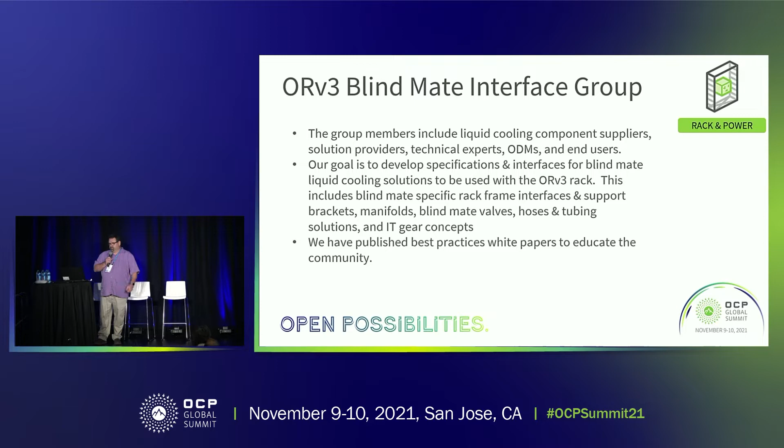Our work streams: the frame. We're developing interfaces, support brackets, and structural enhancements. I'll talk briefly about it a little later in this slide deck, but as we get further along in the discussions, we'll get more details from others in the group as they come up.

We have the BlindMate Manifold work stream, which includes interfaces and design specifications. We have BlindMate Quick Connector as well, where we're developing specs and developing components from multiple suppliers. And the BlindMate IT gear specification - we're not making a spec where you have to make a chassis just like what we're providing, but we're going to provide interface requirements as well as a design concept that people can leverage for their own designs as needed.

And on the hose and tubing solutions, there are unique requirements around BlindMate that we'll get into a little bit later, and we've been working quite a bit on that.

On the white paper side, we have a manual couplings and hoses best practices that was released last year, end of summer, through COVID, which was pretty cool to see us actually make some solid progress despite those challenges. And this past summer, we released a logistics integration best practices, and I'll talk a little bit more about those moving forward.

So let's talk about the concept for ORv3 and how we're mounting manifolds. This is a review of the rack. The manifolds are installed split on each corner of the rack with the cold and hot on opposite sides. The idea is to maximize the amount of service space between the bus bar in the middle and each of the manifolds for things like modules and fans.

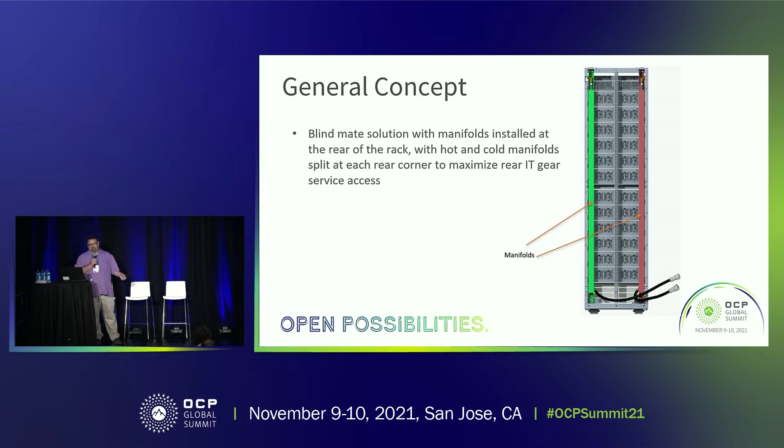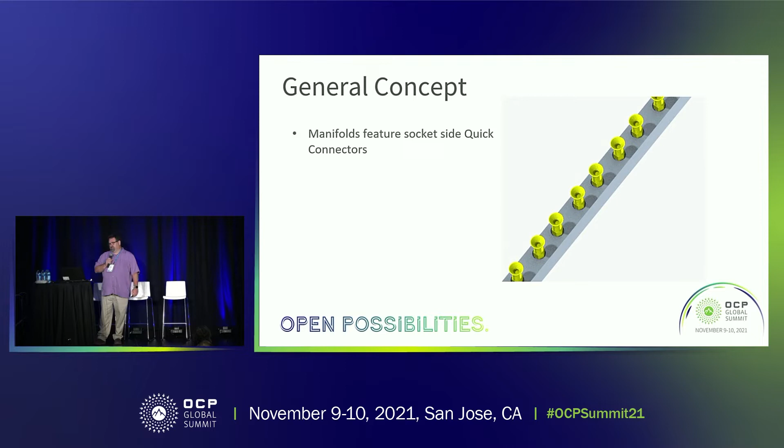On the manifold side, the manifolds feature what we call the socket side of the connections with the valves - that's what the yellow geometry is showing there. On the IT gear side, there's the plug side, which are those yellow items kind of shadowed inside the box. They're in a protective area inside there, as well as unique features for mounting them and interfaces for BlindMate injectors and things along those lines that we'll talk about again a little later.

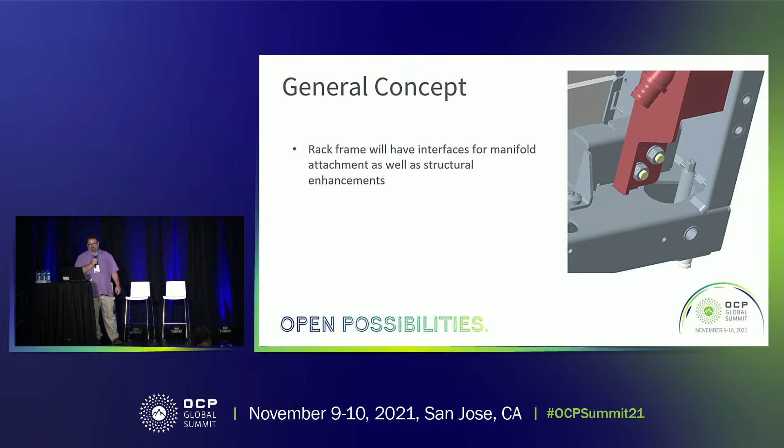And I'm being high level on purpose. I want to give people an understanding before we dig down a bit more into the details. So stay tuned. On the frame side, we have interfaces for mounting the manifolds as well as structural enhancements to overcome things that we'll talk about in a minute here.

The features include stiffening members to counteract the mate forces from the fluid pressure, as well as the springs and all the valves - you start adding them all up, the forces add up very quickly. The manifold interfaces and mounting features will also be in the rack. I think Stephen talked about this a little earlier - the idea is they're going to be bolt-on items that you can add as needed. They're not fundamental to the frame, making your ability to change fairly easily from a regular rack to a BlindMate rack.

We also have been using an extensive amount of FEA analysis to optimize this design. We're talking about FEA by the manifold suppliers, by our folks at Wiwynn on the IT gear side, as well as Rittal.

We have a guy who's spent a tremendous amount of time optimizing the design in terms of structural analysis, which has been awesome, great teamwork there. We've also had some challenges around the need for tighter tolerances with BlindMate. When you're talking about a frame at scale, sometimes those manufacturing methods aren't the most tight in terms of tolerance capability, so there's been a give and take in optimizing around those trade-offs. We're also focusing on ease of assembly and modularity.

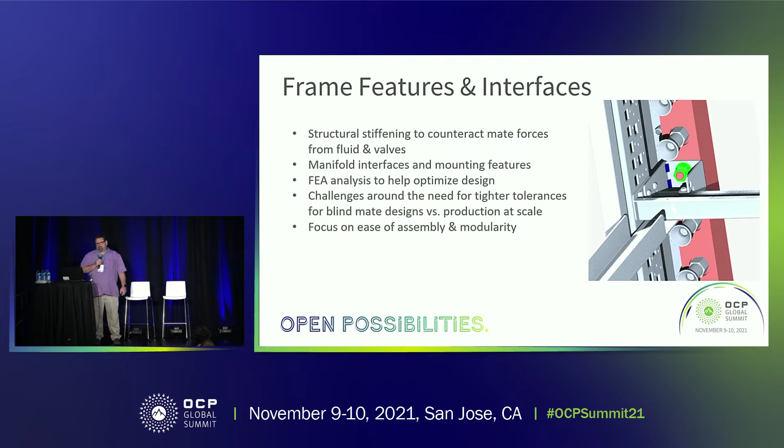A little bit more on the manifolds here. Similar theme around tolerances: if you think about a manual connection with a hose, you don't really care where those valves are because you have a flexible hose connecting between elements. Whereas in a blind mate, you really care about registration in terms of where it is, so there's a lot of work around getting that to work out.

I can't tell you how many tolerance loops the team has done. We have registration features for ease of assembly, and over the last build we made a huge improvement there. Also, the manifold is actually a structural element - it has to help counteract these loads. It can't be this thin metal, thin wall design. It's actually a key part of ensuring the design is robust.

We're going to define the key interfaces and features, but we're going to allow freedom for suppliers to do things in non-critical areas. We're not going to specify every radius, every wall thickness, every detail. We're going to provide the interfaces and features on the frame and key location requirements for the ports.

We've also developed this past year the idea of a modular air purge option. If you look in the upper right there, that copper colored piece can actually be removed with a quick connector. So if it gets damaged, you don't have to throw the manifold away - you get your replacement, put it in, and you're still off and running.

Another thing is we're trying to keep it simple and consistent with the industry, so all of our port callouts are per industry standards.

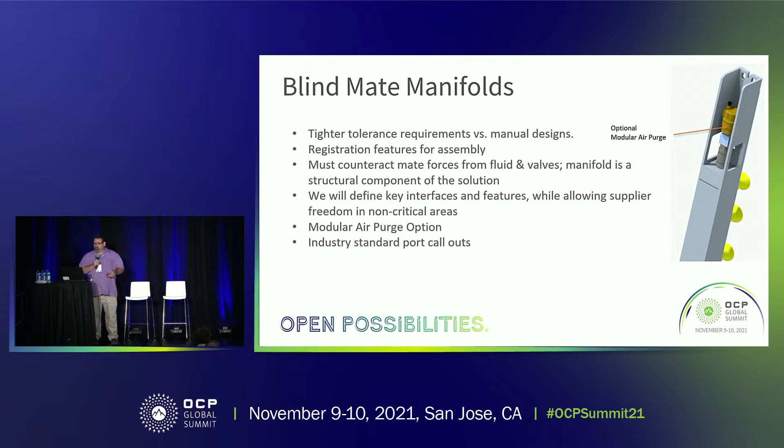On the blind mate valves, due to all the rack tolerances, deflection issues we talked about from the mate forces, gaps between gears and racks, all those tolerances that stack up, this design needed to be different from a standard solution that was readily out there.

We have increased radial and angular float. We have a longer working range, which means the range in which the plug and socket can work whether mated, and that's critical for things around tolerancing, handling, shock and vibration. We don't want things leaking, but you also want really good thermal performance despite those tolerances. You don't want to have a drop off and an impedance change during that working range.

One of the key criteria early on the team set was we also didn't want the valves to turn into guide pins, where the IT gear mates in and the valves basically hold everything in place. Part of the reason there's such large floating capability is we wanted the gear to be able to move freely with respect to the rack and manifold so that we're not creating these loads and potentially creating damage and leaks, which is a goal we don't want to have.

The other thing is interoperability between suppliers. It's actually been one of the biggest challenges in our group because we have 4 suppliers - they're all designing their stuff in their own way, but we want to make sure we have reliable connections, no binding, no leaking. We made some really good progress this last time, and we currently have 4 suppliers developing solutions.

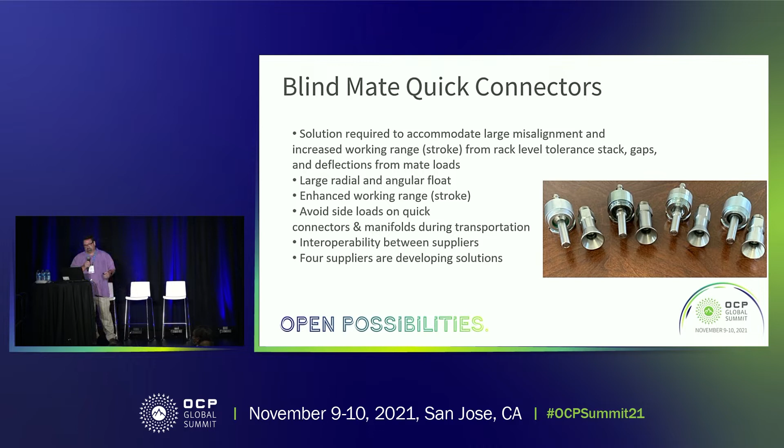On the IT gear side, it varies from a standard IT gear in a few ways here for blind mate. The interfaces for the plugs themselves have unique features. We have hose guide features inside the gear to route the hosing and tubing so that we don't have issues with it fighting with the valves. We also have long stroke injectors to provide mechanical advantage during install - notice it doesn't say ejector, it's an injector. Its job is designed to overcome the mate forces from the fluids and valves and help the user install it into the rack.

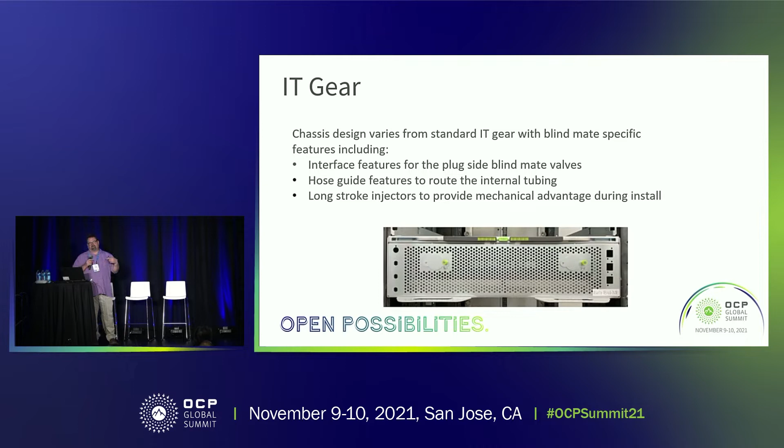Hose and tubing. We've been developing this, and I can't understate the amount of work that's here. It sounds like a simple topic, but it has not been. We developed hose and tubing solutions to meet the standard key criteria of mechanical, pressure, fluids, chemicals, material compatibility, those type of things.

But the floating nature of our plug side requires us to be very careful in terms of how we deal with this area. The hoses, we need to consider how it's being guided. We need to consider how it's terminated, as well as it needs to be flexible. We don't want it fighting our valves when they're trying to float and mate and align.

So we developed some hose guide solutions for internal routing. We've done a lot of work on test methods and acceptance criteria for the hoses, and we've done an extensive amount of testing on multiple solutions.

The whole idea, kind of summarizing this, is these are going to be reference options. We're going to list them as potential things you can use, but we're not requiring the end user to use these. It's like, we can give you a valve, okay, but now how do I use the valve? What do I connect it to? We wanted to provide, like I said earlier, a holistic solution. So we're going to list these in the spec as options, and there'll be some information on those.

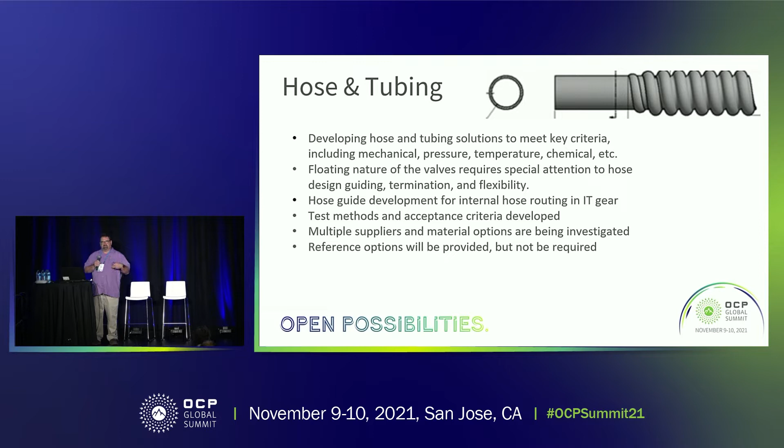And then most recently, this past summer, we spent quite a bit of time here. Nigel Gore from Vertiv was a big help in heading up a lot of this work. We developed the Logistics and Integration Best Practices white paper, focusing on areas such as testing, integration of gear, and shipping. That was put out again in the summer.

So, some high points in terms of what we've done over the past year. We completed our first level of valve testing at the component level as well as at the rack. We've done improvements in manufacturability of the manifolds. We've significantly reduced the user forces from inserting the IT gear into the manifolds due to fluid pressures and springs, as I mentioned before. We've made a big jump in terms of improvements in cold plate serviceability, and we're going to get into some of those things when we talk about the valves on the IT gear side.

We've developed and tested new hose and tubing solutions. We've made some refinements to the hose routing. As I mentioned before, we did a lot of learning over this past year on the effect of the hose routing and design on the performance of the interfaces.

We've started a lot more focus on interchangeability testing. We're going to be doing quite a bit of that moving forward in the next year as we ramp up our testing. The blind mate test specification requirements, whether it be on the manifold side or the valve side or the IT gear side, we've made quite a bit of development in terms of the details in those areas as we're moving forward and learning.

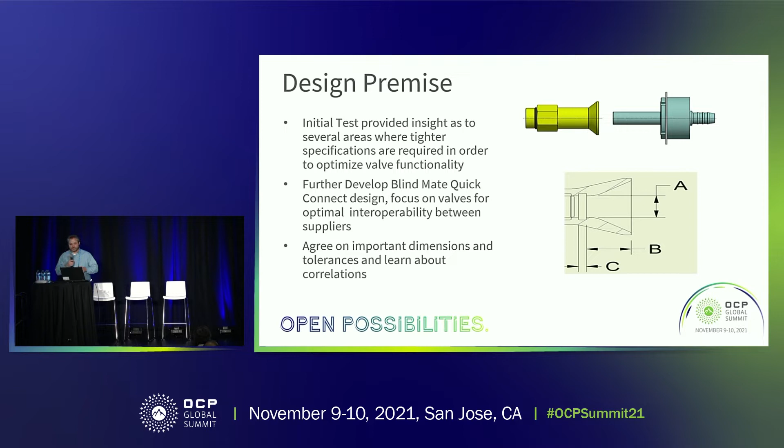In terms of connection forces and springs, one of the main areas was getting the latch mechanism to connect everything together, and trying to minimize the amount of connection force on each blind mate connection, because there's a large number of these per manifold, and when you try to connect several together all at one time, it adds up pretty quickly.

So then the spring force was optimized to make sure it would overcome any kind of O-ring friction, but still be able to close all the valving while also allowing for proper flow. The spring material, design, and properties—we worked out the appropriate stiffnesses for each size, and then did test iterations for the mating forces, working on improvements from there.

Because it has a high impact on the ergonomics you see right at the end when you get into the latch mechanism—that separation force is made up of several different elements as you go together: your spring forces, hydraulic separation forces, any hydraulic pressure within these couplings as you put them together, and any friction that has to be overcome as you keep going.

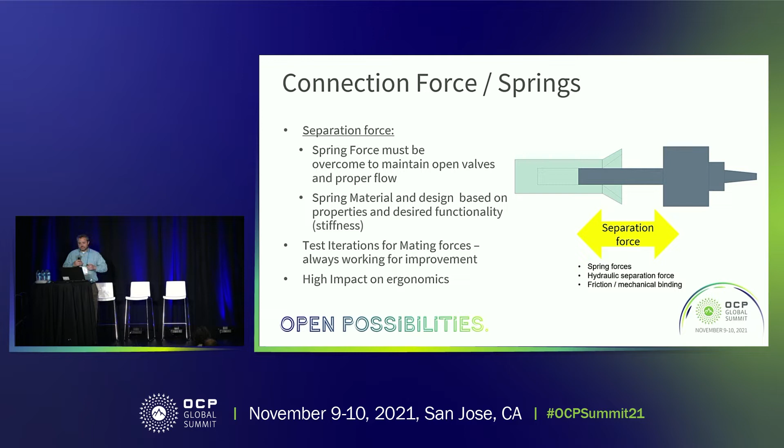Another key area we had to work through was flow performance. Making sure consistent flow performance through each valve was important to us—not just from an interoperability standpoint, but also depending on how much axial tolerance you have between start of connection and maximum connection condition, trying to maintain not just the flow impedance of the interchangeability, but all those different in-case conditions within a fairly narrow band.

Thankfully, the team was able to work through this—everybody came in below our initial requirements, but we were actually able to optimize and bring everybody into a fairly narrow band as we went through. That was a pretty nice collaboration with the team there.

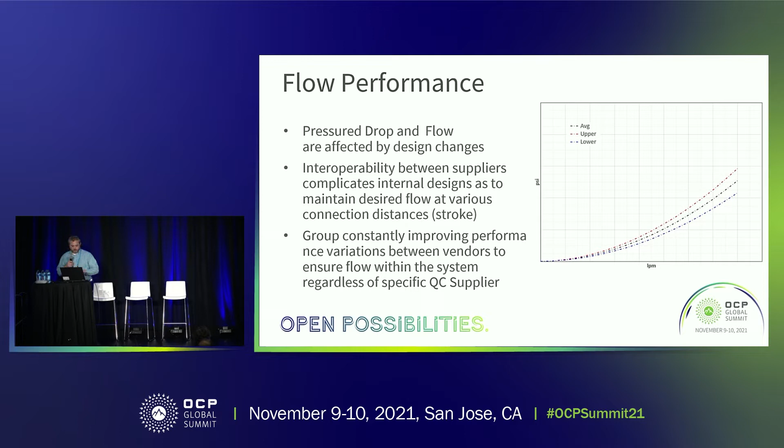In addition, as Glenn mentioned, we found there are many different factors that can influence how these couplings work, and hose conditions was a big one—where the clamp design is, how much force there is, any kind of loading on that backside really caused things to change as we went forward. So trying to maintain consistency with that part was important, and having the testing done within a standardized set of parameters was really key.

As well, there were several things we did with the male part to ensure it could be installed with a panel nut on the backside instead of something that's a little bit more difficult to install.

I know, Noman, you wanted to go through the rest?

Thanks, Tim. All right, my name is Noman Mithani. I'm a mechanical engineer at Meta.

The next part of this really flows into what Tim just talked about—how important hoses and tubing are to the operation of this blind mate quick connector. So why is it important? Hoses and tubing are the interface between the blind mate valves and the IT gear.

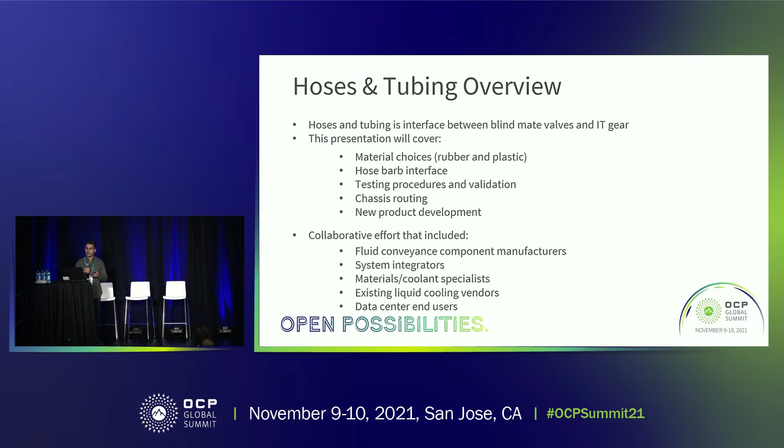This has been a collaborative effort that included our partners at Fluid Conveyance Components like Danfoss and Parker, as well as system integrators putting these systems together, materials and coolant specialists, existing liquid cooling vendors, some of them showcasing in the expo hall today, and data center end users, especially at Meta or other hyperscalers that are already putting out these products at scale.

The two main choices we decided on for material are rubber and plastic. Before I get into that, one difference between hoses and tubing is that hoses are generally flexible materials stacked in multiple layers with reinforcement in between. Tubing, on the other hand, is a single wall construction and usually stiffer to maintain the same performance and pressures we're looking for, but it needs some kind of special geometry to make it flexible for our use case.

On the rubber side, we picked EPDM. The main advantage is proven fluid compatibility. It's already widely used in industry today, and because of that it's mass manufactured and cost effective. It's also used in other industries like hydraulics and heavy industries, so it's been proven out. Because it's rubber, it's also flexible, but at the cost of larger diameters, since it needs multiple layers with reinforcements in between, making it generally bigger in diameter than something that's a single wall.

It also creates an elastomeric seal at the barb interface, which is really important when installing the hose into our blind mate quick connectors or the manifolds. It needs to be easy to install, but also create the clamping force needed to hold that seal.

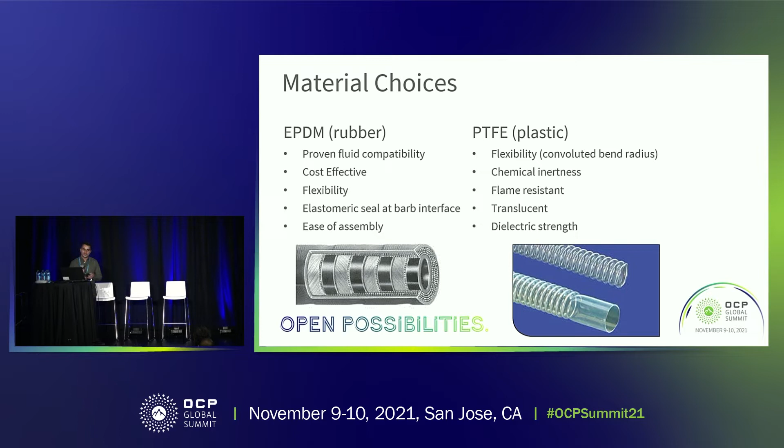The hose barb design is the interface between what's on the valve and the hose inserting into it. The main requirements were we wanted a clamp-free design to aid assembly and efficiency of rework—meaning we don't want any screw clamps adding on top of the hose barb seal. We also want to hold 5 times working pressure consistently over long periods of time and elevated temperatures, meeting the high reliability standards we have for hyperscalers at scale, as well as staying within the dimensional requirements of the blind mate plug.

The two main iterations between EPDM and PTFE were a little different. EPDM is already conventionally used with a push-on style without clamps, so that was generally adopted from existing designs. PTFE is a bit different because it hasn't been done as much in practice. What we're trying to balance here is that we want lower insertion force for ease of assembly, but still have enough clamping force to maintain the seal and the pressures we're looking for.

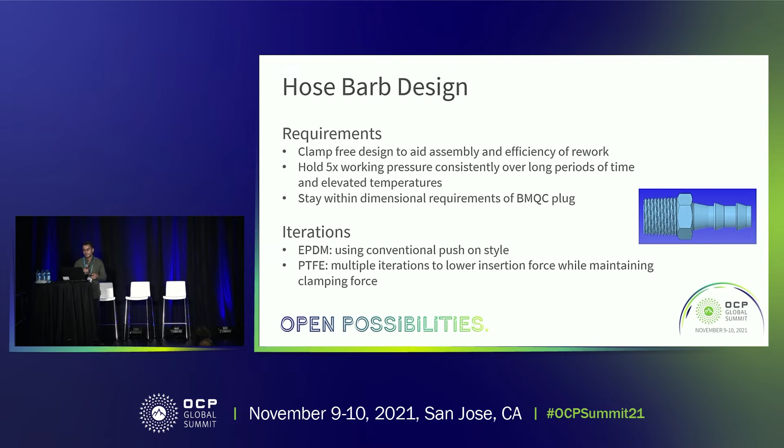A couple iterations on the hose barb design for PTFE: it has the same requirement of a clamp-free design, but something new added is that we want installation without buckling the tube. It's a single wall, and a thin single wall, so it has a tendency to buckle if you're inserting it with very high mate force. But we do want enough clamping force that we're not degrading the seal over its lifetime.

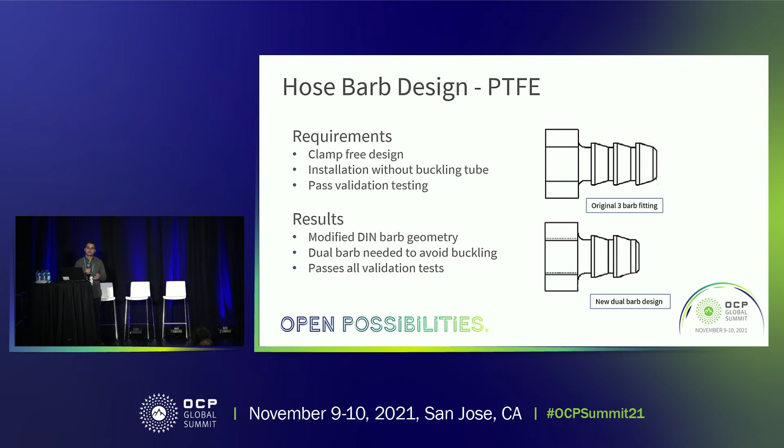So what we did is we started with a standard DIN barb geometry and modified it from there through the testing we conducted, which I'll get into in the next slide. There were a couple geometry iterations, going from a 3-barb fitting to a 2-barb, and just optimizations into the diameter to get it right where we want it to be.

So some of that testing, what we did was we worked with all of these industry partners to define a set of requirements that meets the performance and reliability requirements that we have, and then set out a long list of tests and validations that we conducted with our partners at Parker and Danfoss.

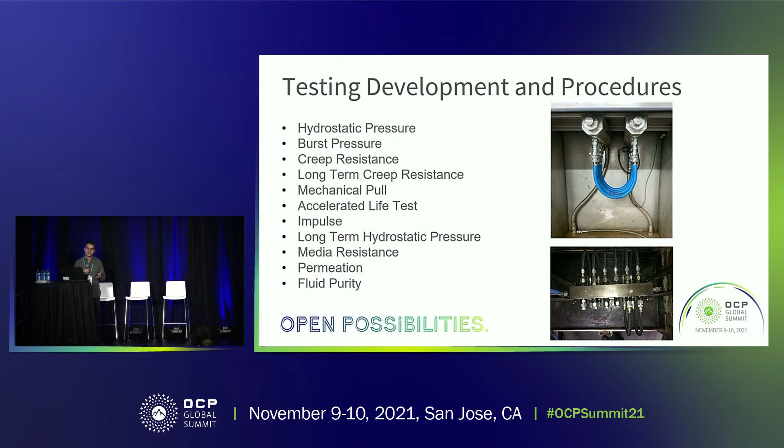The main ones here are really just hydrostatic pressure, temperature, creep resistance, accelerated life test, and then some of the smaller ones that actually become pretty important when you're using these for long periods of time is permeation - so how much coolant is being lost to evaporation over time - and fluid purity, so what kind of chemical interaction these hoses impart on the coolant. That has a huge impact on the life cycle of this cooling solution.

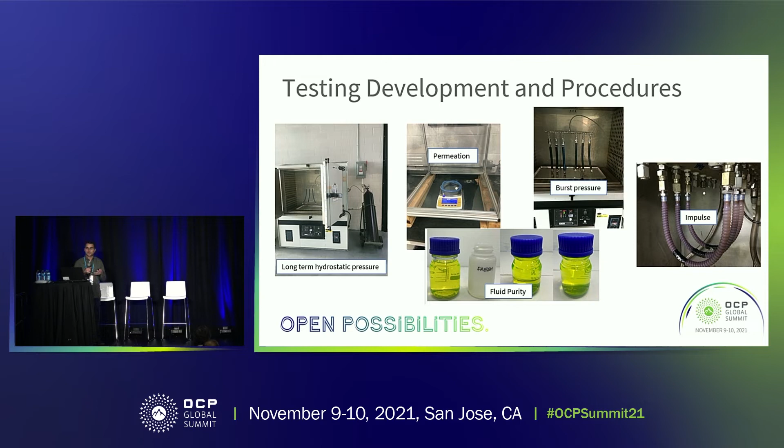So here's some pictures, both at Meta and at our partners, of testing that we conducted over the last year and a half to validate the few products that we've outlined in the next few slides. This is not an exhaustive list of products - like Glenn mentioned, this is more of a guideline - if these requirements are met, then we're trying to make sure that it works with the rest of the solution.

So like Tim mentioned, chassis routing is a pretty important part that we found out. We know what our systems are going to look like in the future. We know upcoming industry trends for high thermal load IT gear, whether that's AI, ML, or other HPC workloads.

So we can take that general board design and then map that out to where the blind mate quick connectors are going to be, and then see where the hose routing needs to be, what kind of flexibility it needs to have to aid valve centering, as well as lower insertion forces. So that's where flexibility, bend radii, hose guide location, and length have a massive impact on valve centering and insertion force. Over the last year, we've tested extensively on hose routing parameters to aid all of these.

And if you look at the Meta booth, you can see an example of a blind mate chassis that has this specific orientation that we're still optimizing, but it's something that we feel is indicative of a future IT gear chassis.

A couple of the products that we've verified over this testing is a new Danfoss EPDM hose that is specifically more flexible for IT gear applications, as well as a Parker EPDM hose, an existing product, that has the same flexible EPDM tube and cover with a textile reinforcement in the middle.

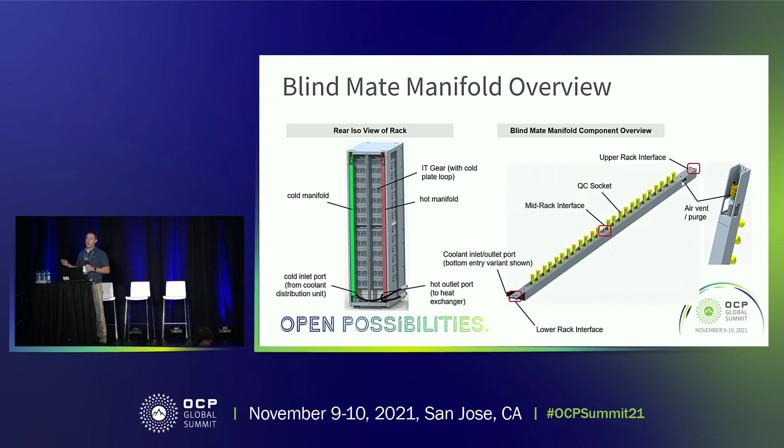Then, of course, we have the actual QC sockets themselves. And again, in this particular implementation, we have an air vent at the top. But again, that's flexible, and you could change that to a barb if needed.

As a team, there's quite a few tolerance challenges that we faced as we started working through the development. We have tight positional tolerance requirements for the quick connects themselves, and that's largely driven by the overall system level tolerances. If you think about it, we have a rack, we've got the IT gear that goes in it, we've got the manifolds, and then all the components as well.

Speaking of the rack, there are some fairly large rack level tolerances, due to some of the manufacturing processes for the sheet metal in the rack itself, that are a major contributing factor in those tolerance loops. The raw stainless steel tubing used for the manifolds has some inherent large tolerances built in, which can be in the form of bowing or twists in the received raw tube stock. So that has to be addressed from a manufacturing standpoint of the manifolds themselves.

And then, of course, if you consider how the manifolds are mounted to the rack and the depth of the QCs themselves, any small angular skew on the manifold actually ends up having a fairly large displacement at the tip of those QCs, and so the design needed to accommodate that.

Some of the design improvements that we made from previous iterations that were shared with the community - we made some improvements on the manufacturing designs of the manifolds for large-scale production, keeping in mind that the end goal is to scale these up.

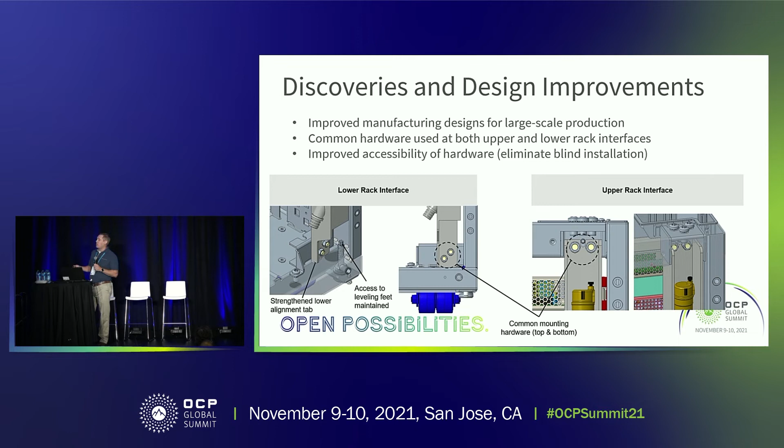We also are making sure to use common hardware at both the upper and lower rack interfaces. Along with that, we improved accessibility of that hardware versus previous manifold designs, where some fasteners had blind installation and you couldn't really see as you were installing them. In the new designs, you have full access and visibility to the fasteners while also maintaining access to the leveling feet at the bottom of the rack.

We also added a mid-rack interface versus the previous designs of the manifold, and this really helps us better control the tolerances in the front to back direction for the manifolds. It also provides structural stiffness to both the rack and the manifold as those are now tied together.

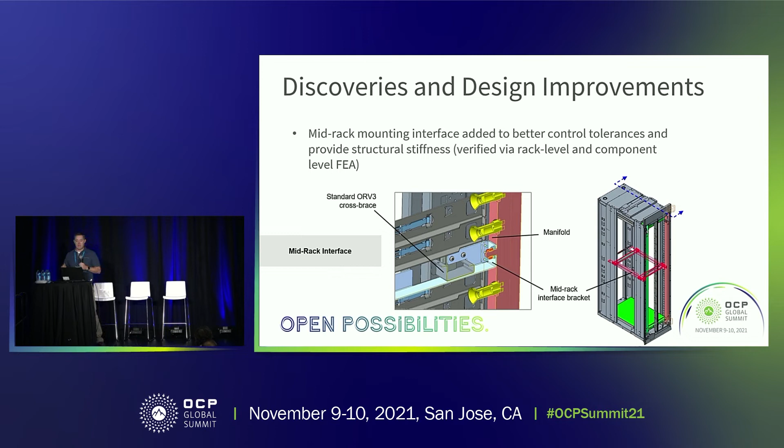Another change that we made is we pulled the air vent in line with the tube itself. In previous iterations, that air vent was actually offset into the hot aisle, and the protective sheet metal pieces that protect that air vent were also in the hot aisle. So those are now in line, which means the total solution is fully within the envelope of the rack now.

So now I'm going to hand it over to Scott. He's going to walk you through some of the simulation and testing efforts that we've gone through during this development effort. Thanks, Darrell.

Throughout the development, multiple suppliers did FEA simulations at various levels of integration. This was done to ensure that the structural requirements were met to give us the tolerances we needed, while still maintaining the strict geometry limitations that we had essentially self-inflicted because we wanted to maintain that design flexibility we've been talking about. We want to be able to have as much open area as possible for various options.

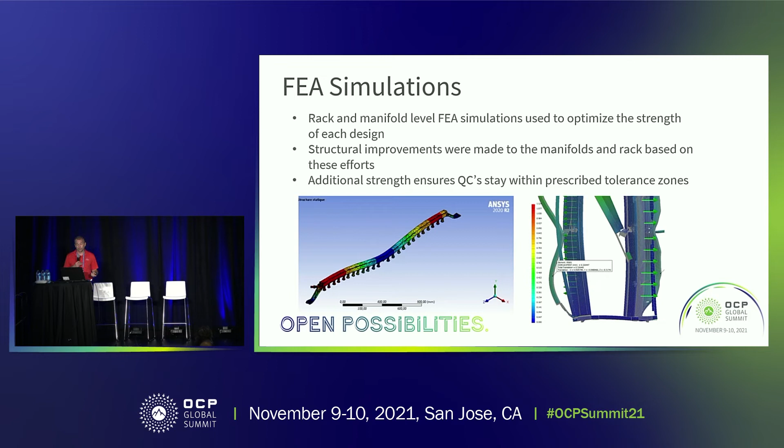So we ensured that the QCs maintain that within the prescribed tolerance zones, as we mentioned, as they open up, they can actually decrease the flow through the system. And if it opens up far enough, if there's enough deflection within the manifold, you can actually stop fluid flow completely versus just reducing the fluid flow.

So flow distribution, why do we care about that? There are multiple factors that affect that. The QC variation between suppliers, as much as we try to make them consistent, there's always going to be some variation between them. The passive cold plate loop within the IT gear chassis is always going to have some variation as well. And even the manifolds themselves, even within one manufacturer, there can be some variations. All those stack up to create potentially some different restrictions in the system.

So what we found was that as the coolant flow variation increases within the rack, the case temperature differences also increase. That then requires additional coolant flow to the rack in order to meet the thermal goals amongst all the chassis. The problem with that is it results in a lower coolant return temperature, which you then need a higher fan power in order to reduce that approach temperature.

So to combat that, the general goal is for the flow distribution to be within 5% of all the branches.

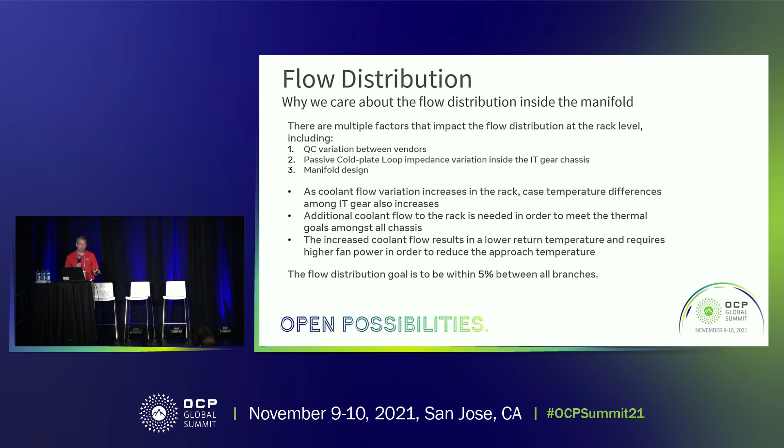Flow simulations have been conducted to characterize the flow distribution across the manifold and identify possible design improvements. What we found was that higher branch circuit impedance results in a more uniform flow distribution across the rack. Also, minimum required branch circuit impedance decreases as the flow rate decreases.

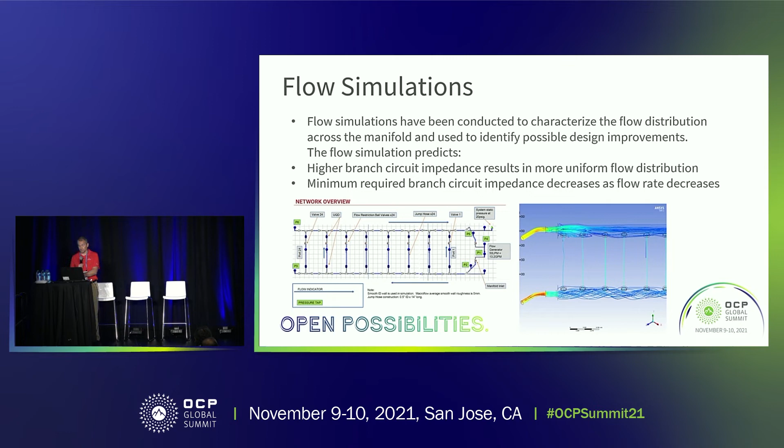So we actually did some real-world empirical testing. We simulated the chassis loops with a modulating valve so that we can adjust the flow rate and the restriction through that. We installed flow meters, temperature sensors, and pressure sensors in the dummy chassis to monitor the flow conditions. And we used a coolant distribution unit, or CDU, as a way to provide the various flow rates that we needed for the various testing.

So the various member companies collaborated together to share insights on various manufacturing techniques for the manifolds. As Daryl mentioned, there's a lot of variation in the raw material that comes in, and then the manufacturing process can really add a lot to that. So we worked together to share insights on what worked, what didn't work, and how we can make this better, to be able to meet the spec that we need, as well as develop the spec to make sure that it's actually going to be manufacturable at scale at a reasonable cost point.

We can make anything tight tolerance, but that doesn't mean we can actually make it at a point that it's going to be a valid solution. So the teams really worked well together to share that knowledge and make sure that we have a solution that's viable.

Part of that was adjusting the tolerances on the spec itself for the manifold, and we wanted to make sure that we were taking into account the various manufacturing techniques at the companies, as well as again that raw material, but really meeting the system level tolerance requirements. And then we also shared the flow simulation and FEA results with the OCP workstream to identify and discuss areas for improvement.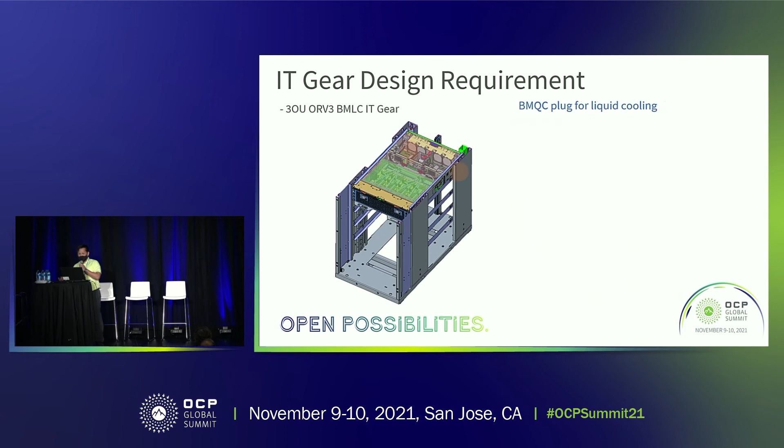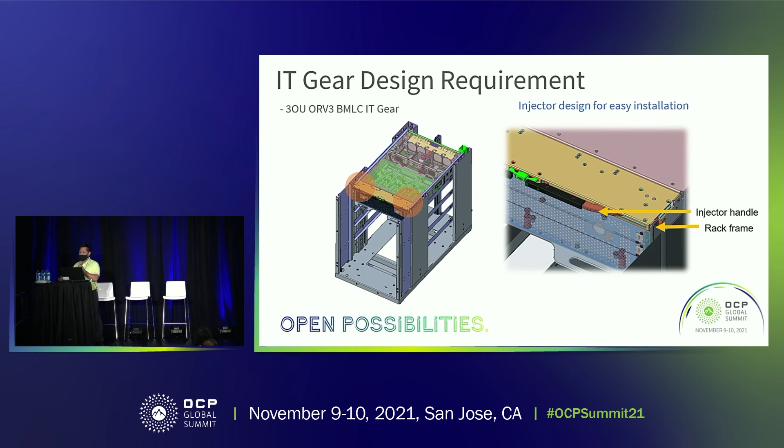This POC design is based on the ORv3 requirement and it's high 3 OU. There is a 48 volt power clip to provide power, and QCs provide a liquid inlet and outlet. Also, we have the injector handles and the release module to provide the installation easy and efficient.

For section 2, IT gear overview, just to give you a heads up, this is a TTV simulator GPU chassis, not necessarily a product. On the front side, we have 2 injectors and a release button, a TTV module and system manifold in the chassis.

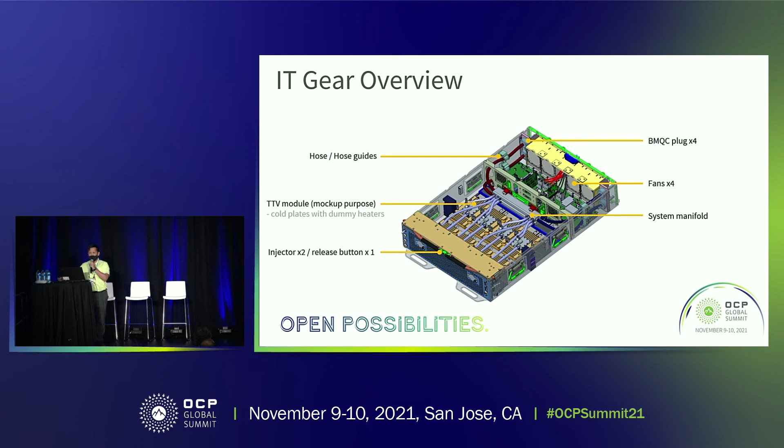4 BMQC plugs on the rear side to provide 2 for liquid inlet and 2 for liquid outlet. We also have a hose guide to constrain the hose movement while installation, and 4 fans to cool other heating components in the chassis.

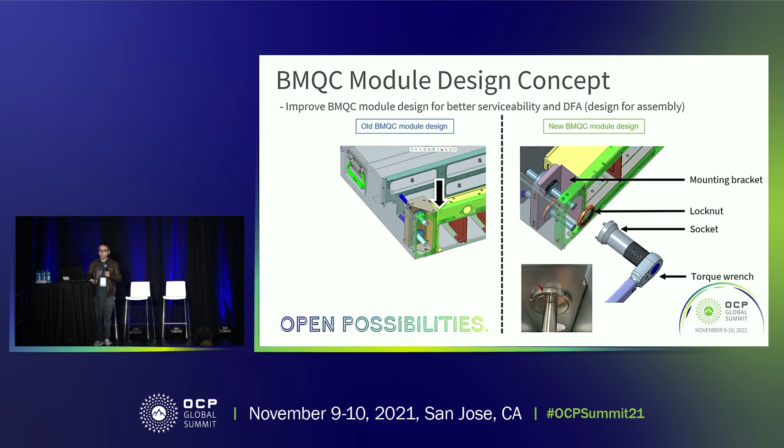So this design is more modular, meaning that whenever there is anything failed, we can simply swap out the components without touching the other BMQC or the other liquid cooling loop.

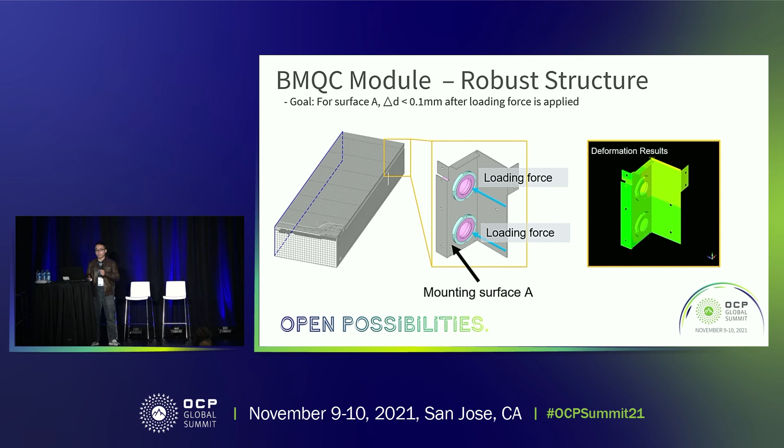We have also run some FEA simulation to make sure that the design is robust enough. This is to ensure that there's no large deformation on the chassis because the loading force from the BMQC is pretty large, so making sure that we don't run into issues. The simulation result shows that the deformation is very minimal, and the result is acceptable.

For the injector design concept, we have 2 pairs of injectors on the front of the chassis, which provide a long stroke and mechanical advantage to install the IT gear chassis into the rack.

When we designed this injector, one challenge we ran into is the long stroke, because the QC has a very long stroke, and for a typical injector with one pivot point, the stroke is simply not sufficient. So we came up with this injector with exceptional long stroke to cover the QC mating stroke.

This animation shows basically the stroke for the QC mating as well as the injector. Essentially, this is the process when we install the IT gear chassis into the rack.

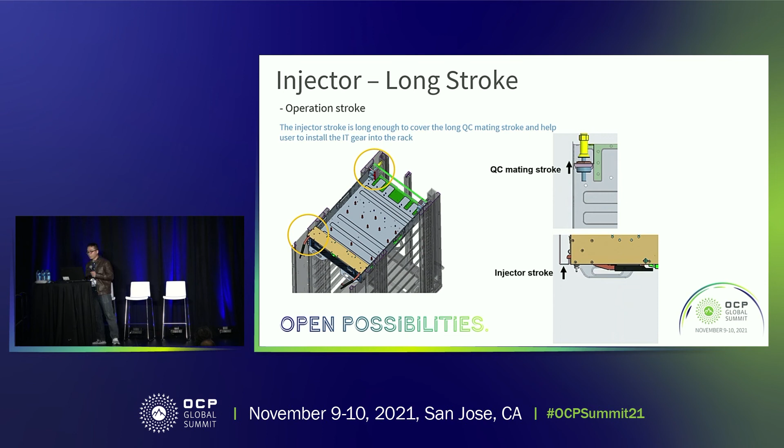Mechanical advantage is another milestone when we design an injector. When we install the IT gear chassis into the rack, we have several forces to overcome. One is the QC spring force from the QCs due to the fluid pressure and the spring force.

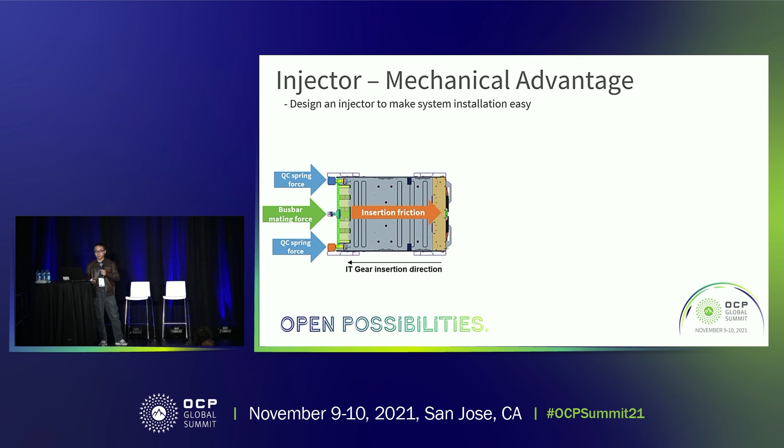We also have the bus bar mating force coming from the rack bus bar, and the insertion friction between the IT gear chassis as well as the rack rail. So to install the IT gear chassis into the rack, the install force needs to overcome the sum of all these three forces, which is large.

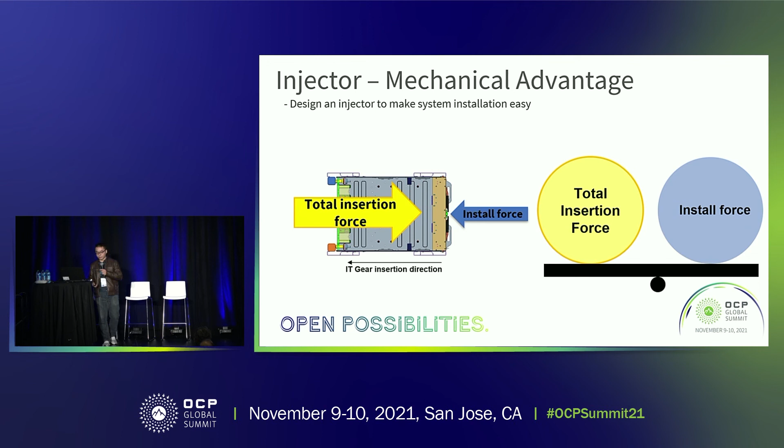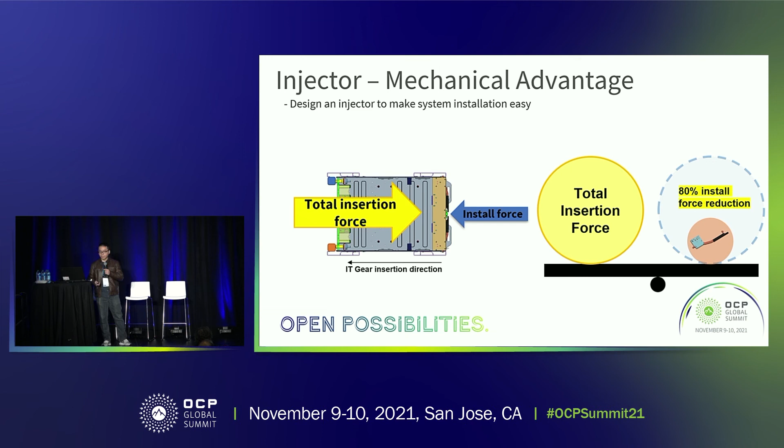But with the mechanical advantage of this injector, we are able to bring the install force down about 80% to make the system installation easy.

Quickly walking through some of the other functionality of this injector. One is the lock function, which basically retains the chassis within the rack, and also the brake function.

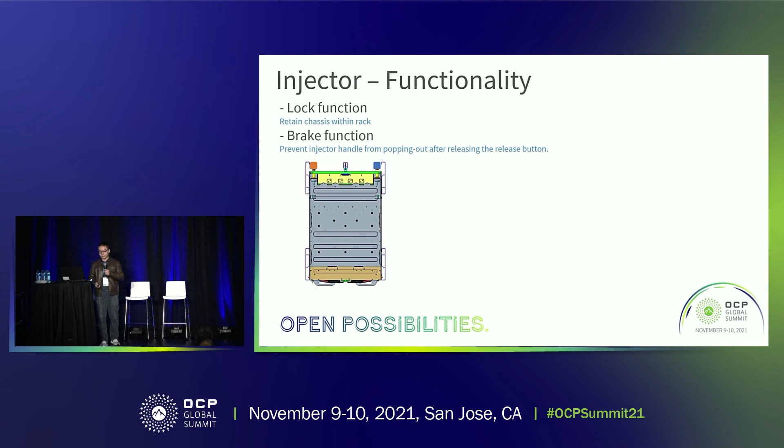So we have this release mechanism between two injectors. When the user presses the release button, the injector retainers on the sides retract and release the injector. When the IT gear chassis is installed in the rack, there's always forces coming from the BMQC on the rail, due to fluid pressure and spring force. So after the user presses this release button, because the force is always trying to push the chassis forward,

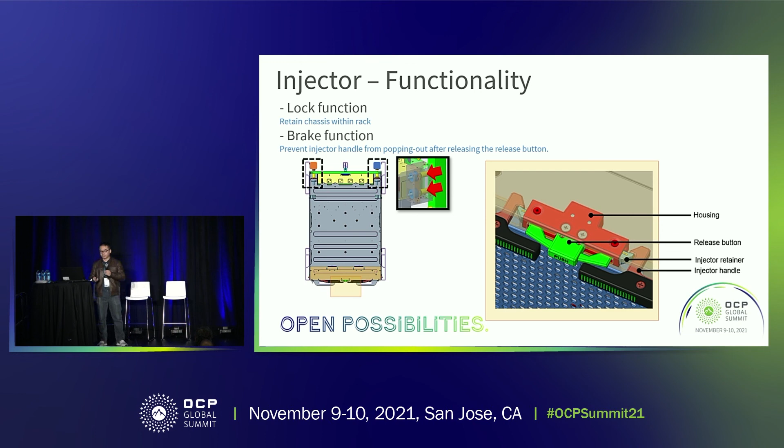it might also pop out the injector, which could be a safety hazard for users. So we also designed this brake function into the injector to prevent this scenario from happening. Essentially, it's a kind of brake function on the injector. After the release button is pressed, the injector handle will not pop out immediately. Within the design, we use a spring to provide this brake function.